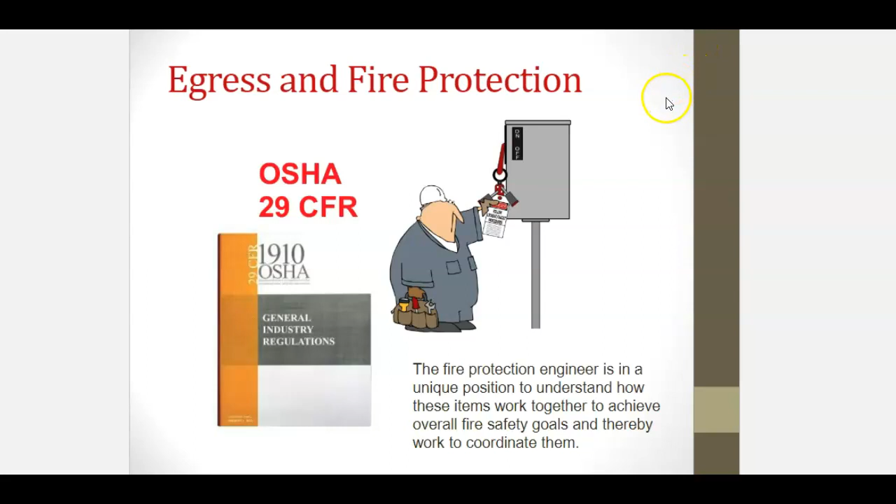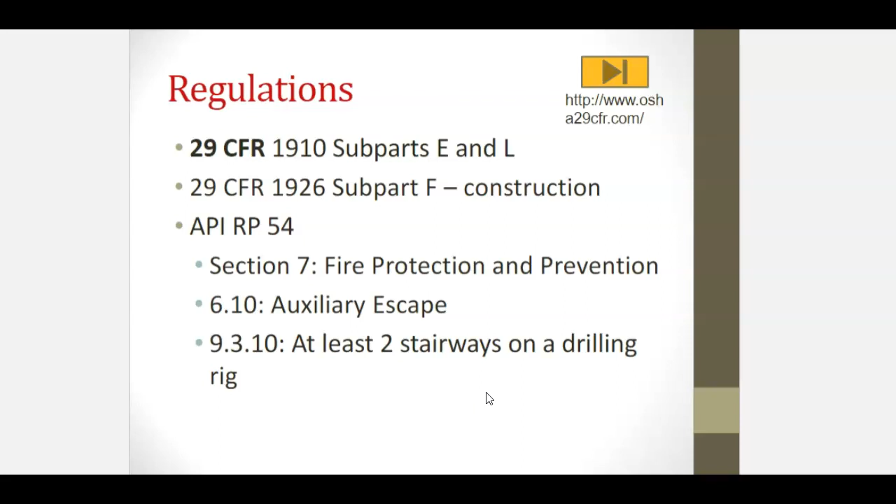There are some key definitions that appear in these sections, the first being exit, exit access, and exit discharge. An exit is the portion of an exit route that is generally separated from other areas to provide a protected way of travel to the exit discharge. The exit access is that portion of an exit route that leads to an exit. Exit discharge is the part of an exit route that leads directly outside or to a street, walkway, refuge area, public way, or open space with access to the outside.

The exit route is a continuous and unobstructed path of exit travel from any point within a workspace to a place of safety, including the refuge areas. It's these parts: the exit access, the exit, and the exit discharge. So they're taking a long look and calling everything exit. It depends on what point in time you are. This is equivalent to the means of egress in the Life Safety Code and most local building and fire codes. It's in compliance with NFPA, the National Fire Code.

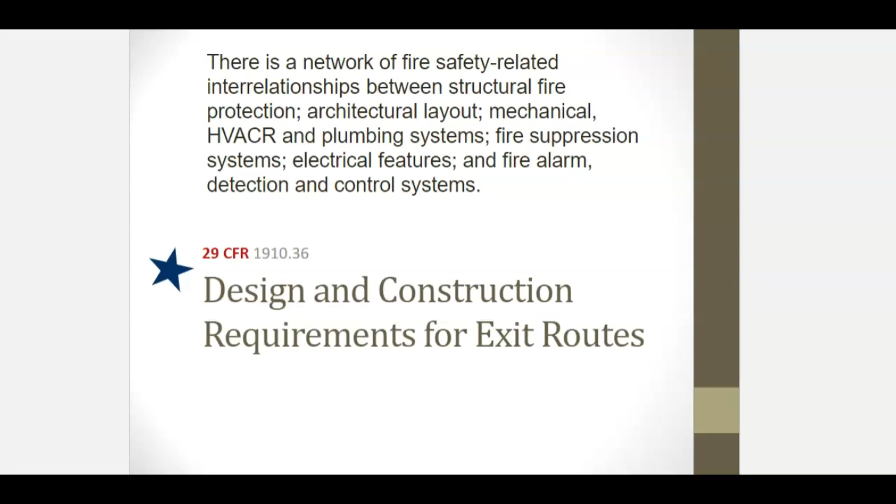There's a network of fire safety related interrelationships between structural fire protection, architectural layout, mechanical, HVACR, plumbing systems, fire suppression systems, electrical features, fire alarm detection, and control systems. All of these come under control of design construction requirements for exit routes. A fire protection engineer can serve as a liaison between these disciplines. Today's feature is really about piquing your interest in becoming a fire protection engineer.

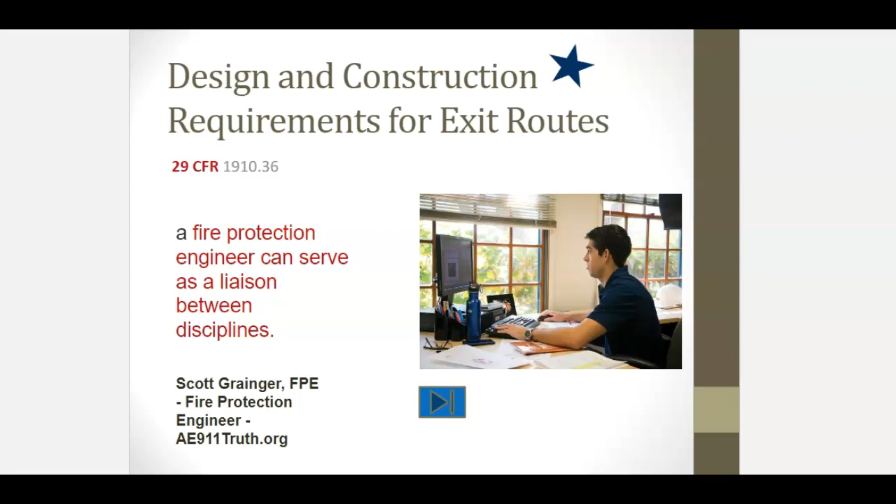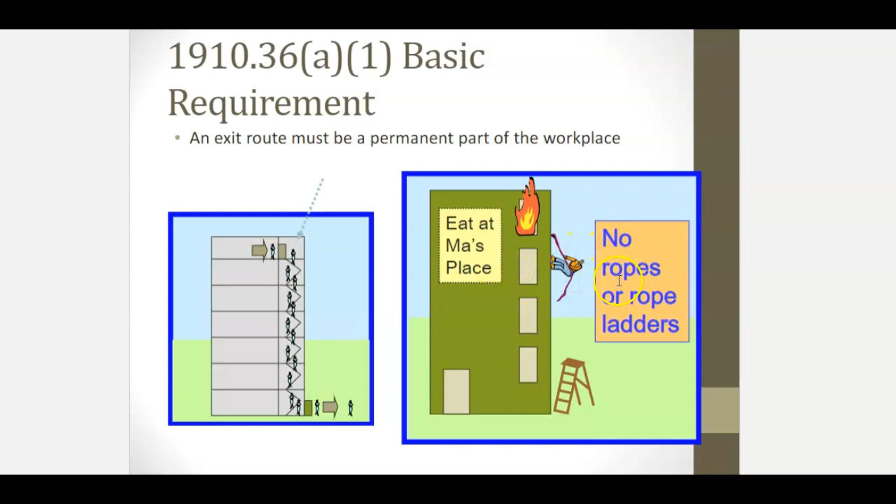You will study requirements. The exit route must be a permanent part of the workplace, whether it be from the vertical down. How will our folks get out of this building in case of a fire? What is their motion of travel? Or are there other alternatives? This one has no ropes or rope ladders.

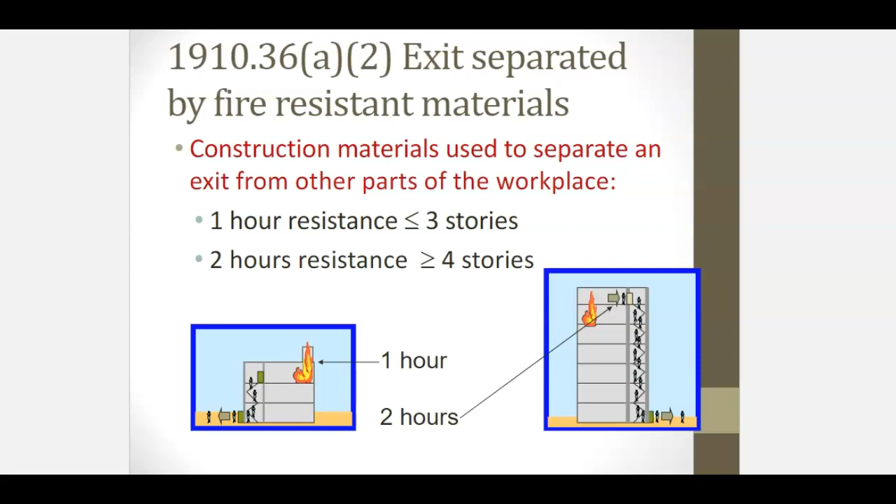Exits are separated by fire resistant materials, construction materials used to separate an exit from other parts of the workplace. We've been talking about having passive fire systems in our walls, to give us 1 hour or 2 hours resistance so that we can safely have time to leave the building. Openings into an exit must be limited to those necessary to allow access to the exit. Each opening must be protected by an approved self-closing fire door that remains closed or automatically closes in an emergency.

At least 2 routes must be available, except for sufficiently small occupancy, as far away from each other as practical in case one is blocked by smoke or fire. More than 2 are required if all cannot safely evacuate through 2 exit routes, which would be your occupant load capacity. And the Life Safety Code can help with this determination.

Here's an example floor plan that shows a life safety path. It must lead directly outside to a street, walkway, refuge area, public way, or open space with access to the outside. So the final part is the exit discharge. There's exit access. You can see that the storage, offices, and fabricating shop are leading into a hallway. The hallway is marked with these dotted lines.

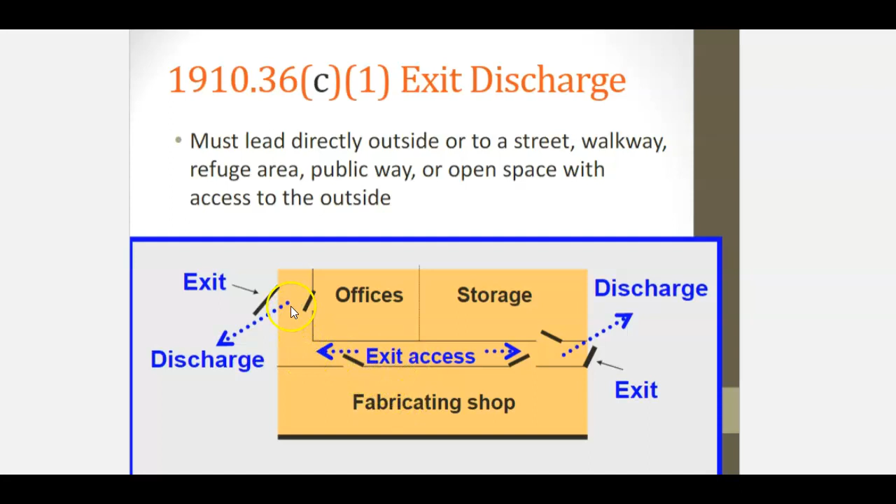The street, walkway, refuge area, public way, or open space to which an exit discharge leads must be large enough to accommodate the building occupants likely to use the exit route. So you'll always see an open space in modern buildings, and it could even be the parking lot directly outside.

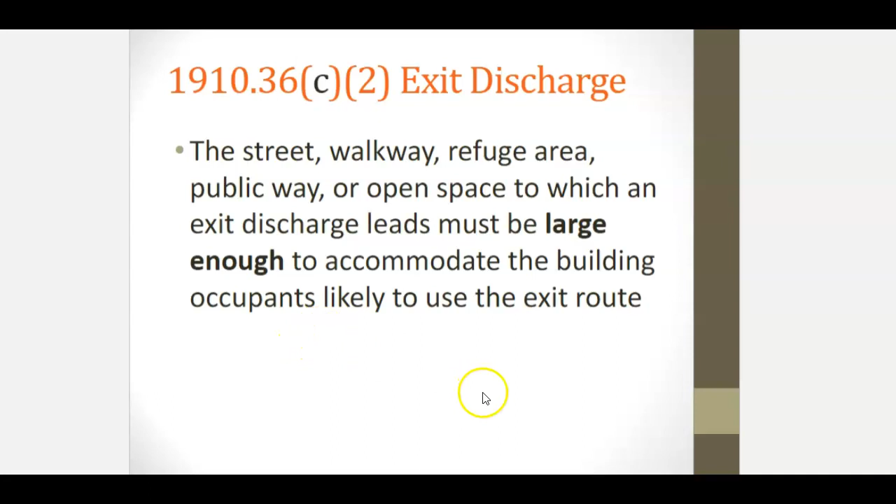Exit stairs that continue beyond the level of the exit discharge must be interrupted at that level by doors, partitions, and other effective means that clearly indicate the direction of travel leading to the exit discharge. So clearly blocked off. Sometimes when you get to the bottom ground floor, if there's a basement, which happens up north, you'll have that gated off. And also, if you're headed into storage, that should be clearly on your sign.

The exit door must be unlocked. You must be able to open the exit route door from the inside at all times, without keys, tools, or special knowledge. You can also use the panic bar. No device or alarm that could restrict the use of the route if the device fails. Mental, penal, correctional facilities are the exception, with constant supervision and the plan.

A side-hinged exit door must be used. The side-hinged door must be used to connect any room to an exit route. It must swing out in the direction of exit travel if the room is designed for greater than 50 people, or the room is a high hazard. So swinging out is important.

And as these dump out into lower levels, the capacity of an exit route must be adequate. It must support the maximum permitted occupant load for each floor served. So if you go into a stadium, you'll see that the stairs down lead to bigger and bigger openings on your way out. See factors for occupant load and capacity in the Life Safety Code, Chapter 7.

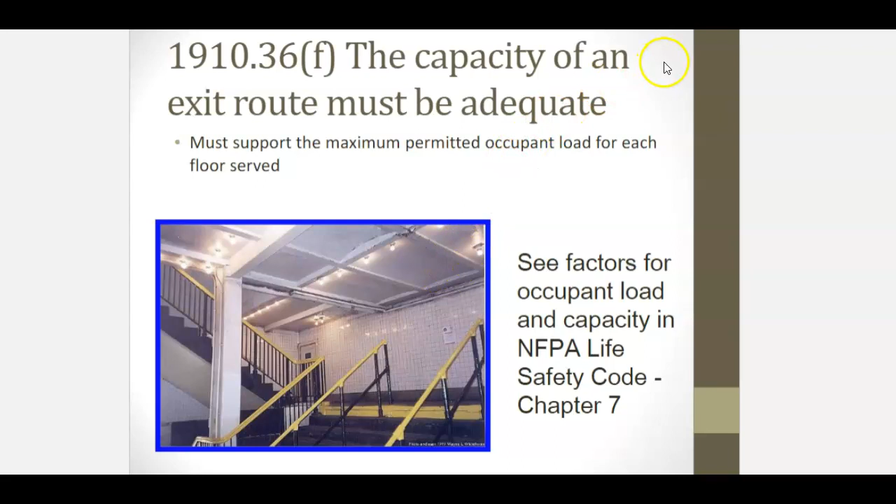The capacity of an exit route must be adequate. Here is our minimum 54 inches clearance to allow enough people to get down, and then it terminates on a handrail, and the handrail has to be a certain distance from the wall. The exit route capacity may not decrease toward exit discharge. It can only increase.

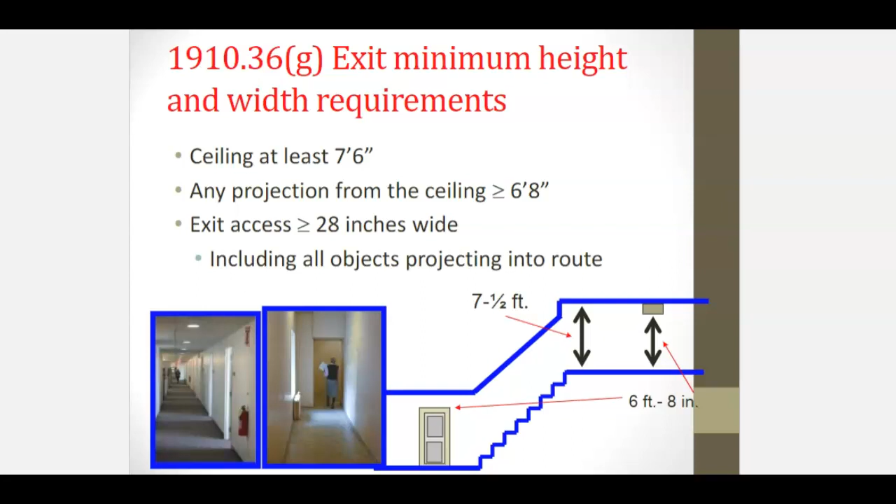The exit minimum height and width requirements. This is a common measurement we look for as builders and designers. The ceiling must be at least 7 feet 6 inches. Any projection from the ceiling must be greater than or equal to 6 feet 8 inches, and the exit access greater than 28 inches wide, including all objects projecting into the route. The most important thing is the route must be clear and free from obstructions.

An outdoor exit route is permitted. Same minimum height and width. Additional requirements are guardrails on unenclosed sides, covered if snow or ice is likely to accumulate, unless the snow is removed before it's a hazard. Reasonably straight, smooth, solid, level walkways, and no dead end longer than 20 feet.

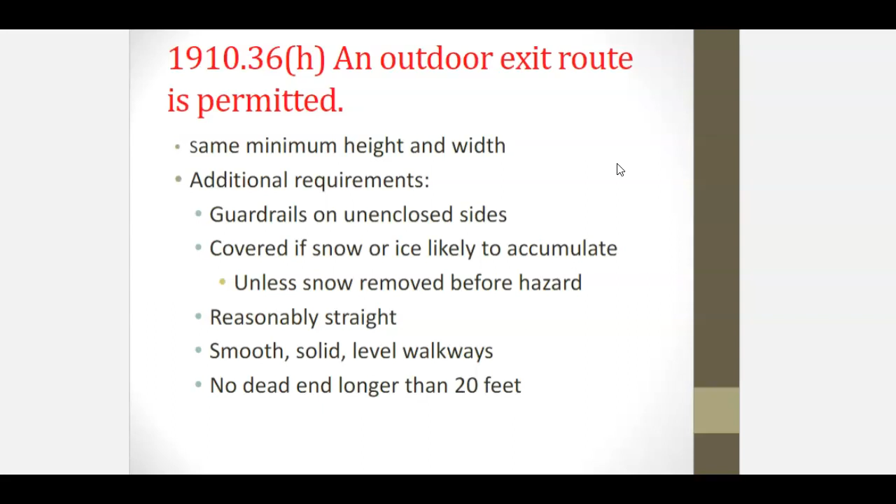What are the maintenance, safeguards, and operational features for exit routes? Danger to the employee must be minimized. Exit routes must be kept free of explosive or highly flammable furnishings or decorations. No exit route may lead toward a high hazard area unless shielded. We looked last week at an example of the fireproof glass that may be used. Nothing that can cause thermal heat to transfer outside of that wall or protective device. The danger must be minimized.

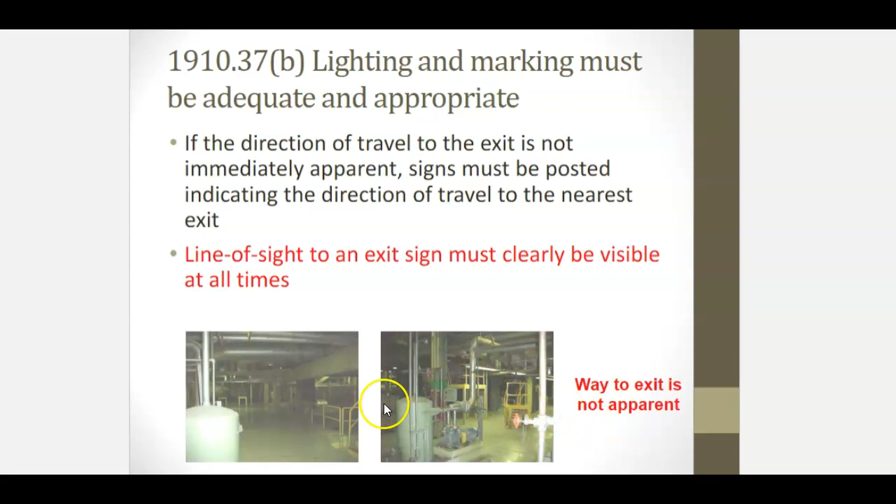Lighting and marking must be adequate and appropriate. If the direction of travel to the exit is not immediately apparent, signs must be posted indicating the direction of travel to the nearest exit. A line of sight to an exit sign must be clearly visible at all times. The way to the exit is not apparent in this picture. There can be confusion. Valuable time could be lost.

Lighting and marking must be adequate and appropriate. There's a whole branch of just graphics that pertain to creating your exit passageways. Each doorway or passage that could be mistaken for an exit must be marked not an exit, so the not is important as well as the actual, or a similar designation, or identified by a sign indicating its actual use, which is a closet.

Each exit sign must be illuminated to a surface value of at least 5 foot-candles, 54 lux, by a reliable light source and be distinctive in color. The word exit is plainly legible in letters 6 inches or greater, and letters 3/4 inch thick.

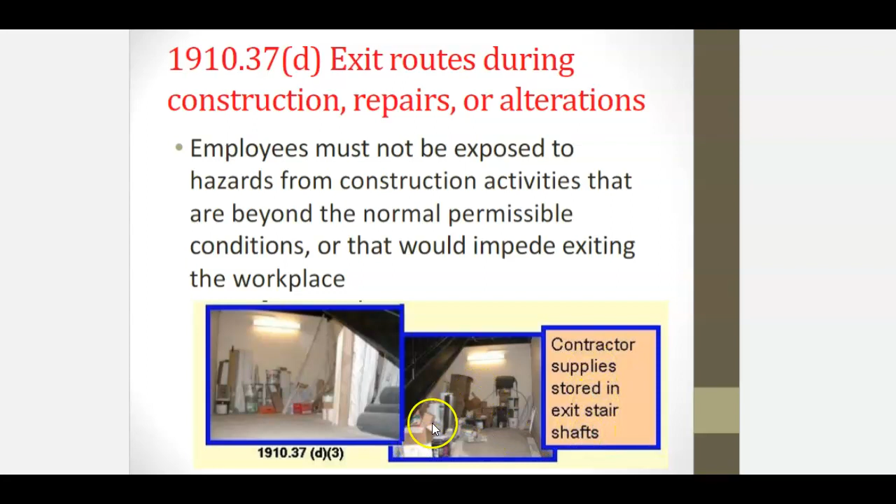Employees must not be exposed to hazards from construction activities that are beyond normal permissible conditions, or that would impede exiting the workplace. A contractor is coming in here and the supplies are stored in the exit stair shafts. So they're trying to hide their mess, but they're putting it in the wrong place.

And the alarm system must be installed and maintained in operable condition to warn of fire and other emergencies, unless employees can promptly see or smell the fire or hazard in time, and must comply with 1910.165.

We'll continue with emergency action plans, things that we think about beforehand before the situation starts. An emergency action plan has to be done in writing. You get together with your group, your life safety committee, and it's kept in the workplace and it's available for employees to review. An employer with 10 or fewer employees may communicate the plan orally to the employees.

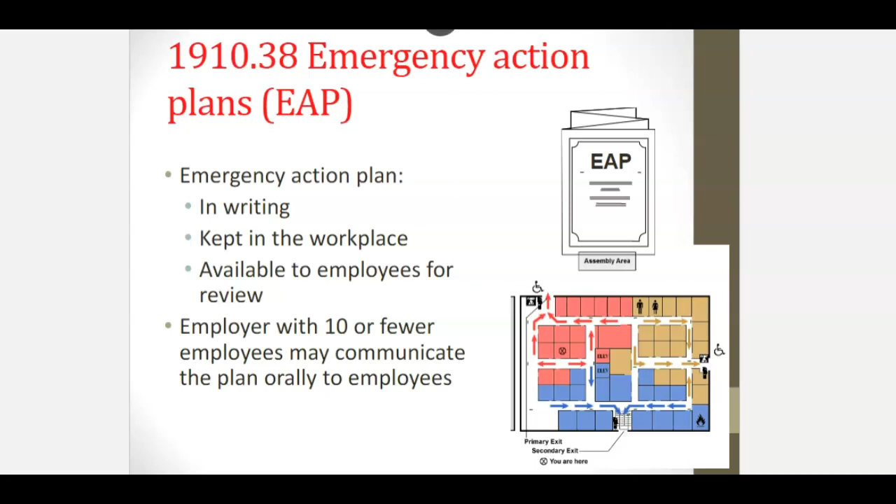But the most important document is the floor plan with the way of exit clearly defined in each room. And here we can see that they progress to different exits. Some go through the main hallway, some through the back, and then there's some in-between areas right here, the dividing line between the two, to get our minimum ratio of exit travel. A closer look. The primary exit and the secondary exit are noted. Area of refuge, looks like they have a little pocket here and a pocket here.

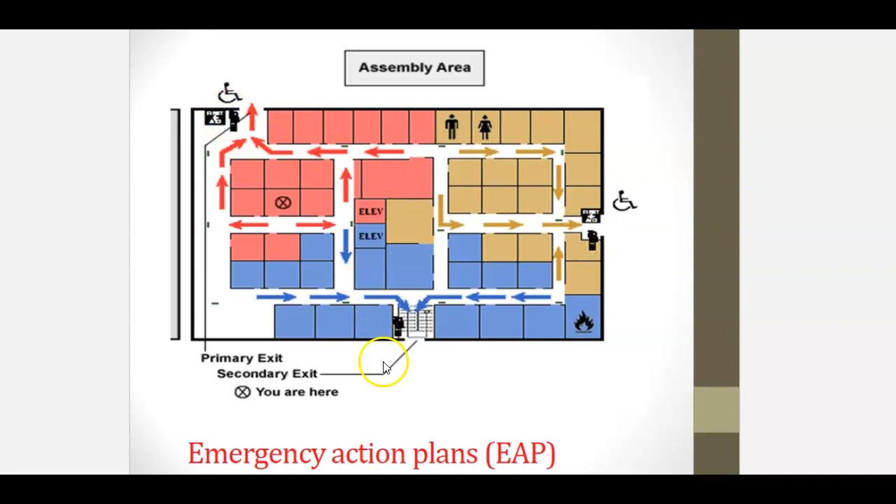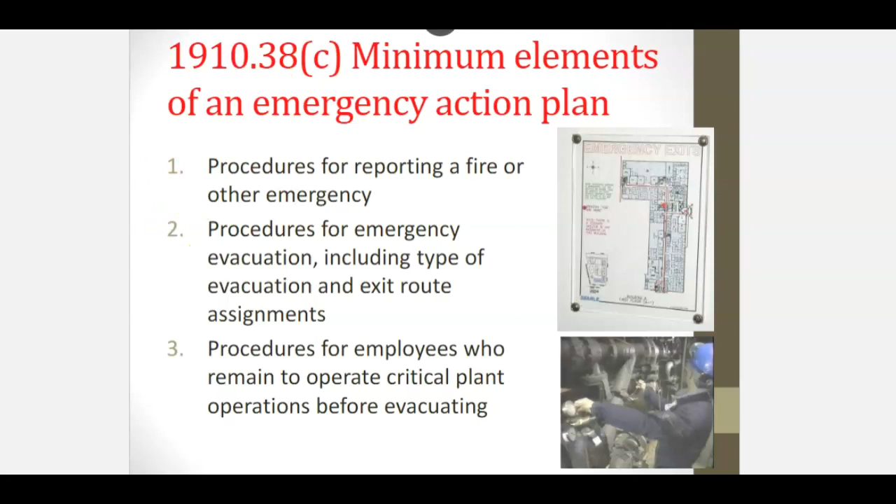What's the least you can do? What's the minimum? There are procedures for reporting a fire or other emergency, procedures for emergency evacuation, including the type of evacuation and the exit route assignments, procedures for employees who remain to operate critical plant operations before evacuating, procedures to account for all employees after evacuation, a roll call, procedures to be followed by employees performing rescue or medical duties, and the name or job title of every employee who may be contacted by employees who need more information about the plan.

Since the bombing of the World Trade Center in '93, well, 9/11, but '93, the Alfred Murrah Federal Building in '95, most recently the events, the threat of terrorism in the United States is an ever-increasing concern. United States citizens as well as emergency responders can no longer take our safety for granted. So they are going into other areas not originally envisioned by the fire plan.

The threats that are part of our current world, of course, preparing for terrorism, chemical threats, biological threats, radiological threats, nuclear threats, explosive threats, and also more closely related is identifying suspicious packages and envelopes and the handling of such.

The alarm system must use distinctive signals for each purpose. You must designate and train employees to assist in safe, orderly evacuation of others. Review the plan with each employee when the plan is developed or an employee is assigned, when an employee's responsibilities under the plan change, and when the plan changes.

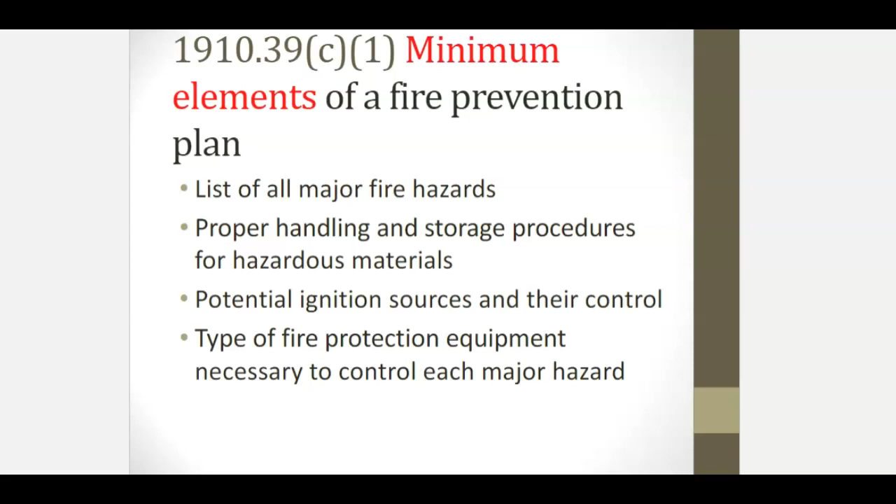A list of major fire hazards that can happen. It's called an inventory. The proper handling and storage procedures for hazardous materials, potential ignition sources and their control, and the type of fire protection equipment necessary to control each hazard. You can see where facilities has its hands busy, right? So they always have a lot to do. The facilities teams, usually about 5 people who govern a campus or can govern one building, keep track of all the things that can go wrong.

1910, the procedures to control accumulations of flammable and combustible waste, the maintenance procedures for safeguards on heat-producing equipment to prevent the ignition of combustible materials, which also means that you have to be sure that you watch your machines, make sure nothing's getting out of hand. Name or title of employees responsible for maintaining the equipment to prevent or control sources of ignition or fires, and the name or title of employees responsible for the control of fuel source hazards.

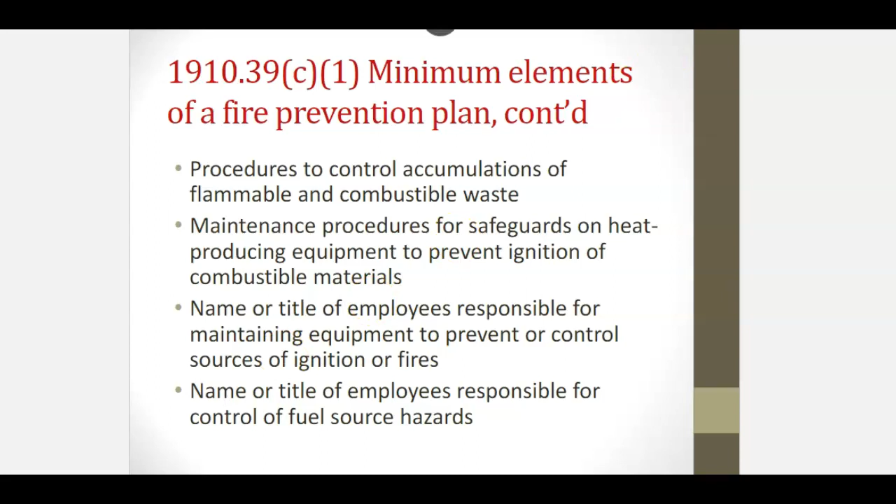An employer must inform employees upon the initial assignment to a job of fire hazards to which they are exposed. An employer must also review with each employee those parts of the fire prevention plan necessary for self-protection.

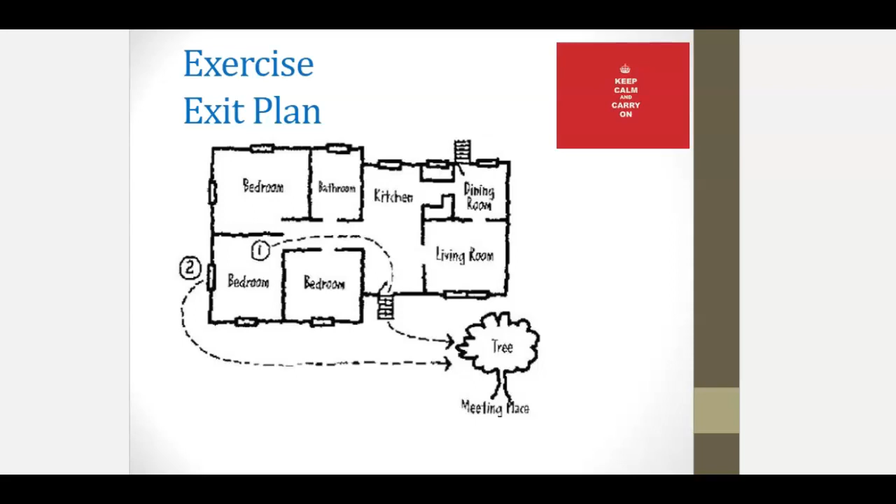And we've reached the end of this set of slideshows. In the future, we may practice creating an exit plan; they look something like this. And for one that's completely drafted up, we can always base our work on an existing floor plan. And this concludes our discussion for today.